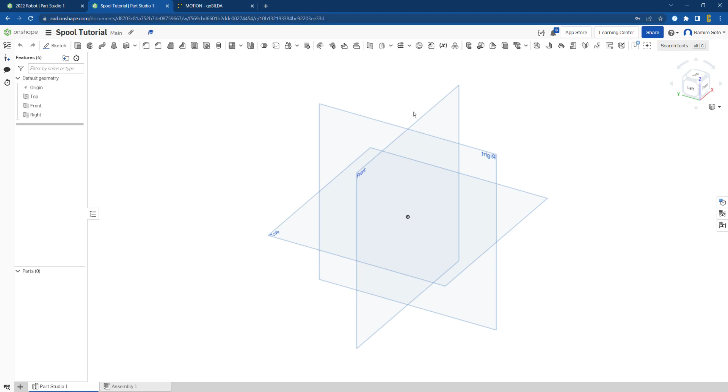Today what we're actually going to be trying to do is make a spool using the Revolve feature. So to start off, you would make a sketch like you normally would. So here's my sketch, I'm creating it, I'm going to select the right plane. With that, I can go ahead and hide the other planes, and I can actually start making my sketch.

The way Revolve actually works is that you basically create a profile of the thing you're trying to create, and then this profile will continue to rotate along its axis. With this, you're able to create complex circular shapes that would otherwise be hard to create. So, for example, in this tutorial, we're going to be trying to create a spool.

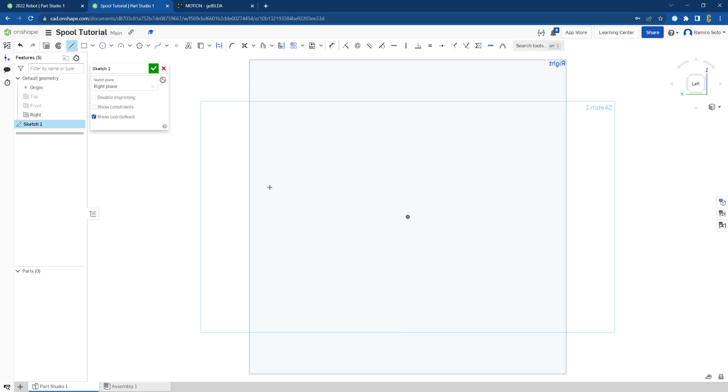So, to start off, we need to establish some things about the spool. In this case, I'm going to be making it a dual valley spool, meaning it's able to route two different strings without them interfering. So, let's start off. First, I'm going to go ahead and try making the first valley. I'm going to make it around, let's say, 32.5 millimeters. And I'm going to make it, let's say, 13.5 millimeters wide.

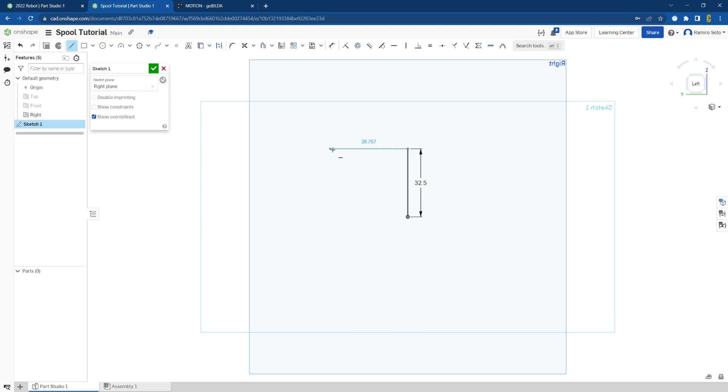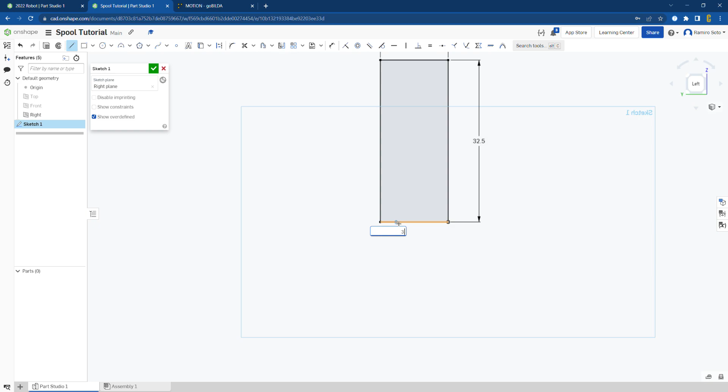Now I can go ahead and try finishing off the square. Obviously, if I were to try and do it like this, there'd be no actual walls for the string to spool around, right? So what I can do is make some other lines down here. I'm going to make this line 3.25 millimeters. And this time I'm only going to make it 28.5 millimeters. With this, I'm now able to connect to the edge.

Now, as you see, we're kind of creating a valley here. So essentially, the other side is going to be a mirror copy of this. By dragging over this line, I'm able to find the center point. If you notice when I highlighted it, a little midpoint symbol pops up. That means we're right in the center. So if I click there and go to side, you can see they're all equally spaced.

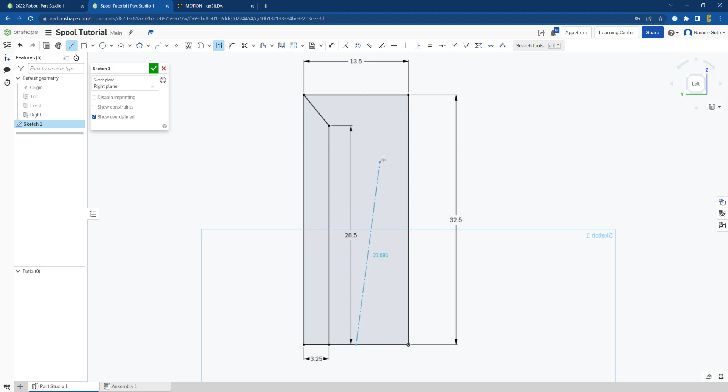If I press Q, that opens up construction. You can also press it from up here. What construction does is that there are lines that show up but don't actually affect the sketch. In other words, these lines won't cause a particular surface to be split into two. So with that, I'm going to make a line down the middle. This is essentially now a symmetry curve.

So I can use the mirror tool up here. Click on it. It prompts you to select the mirror line, which is essentially going to be the line of symmetry. In this case, it's this. And now it asks you to select the entities to be mirrored. So I'm going to be selecting this and this. So now if you notice, it's actually symmetrical. Now I can grab a line tool again and connect these two.

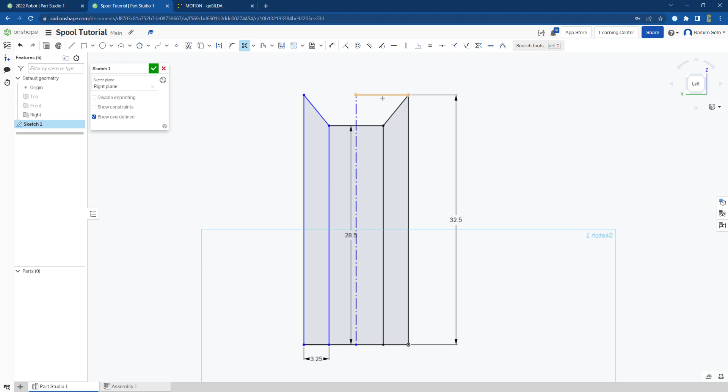Now, using these scissors up here, called the trim tool, I select this line segment and I can actually delete it. Now, as you may have noticed, those lines suddenly turned blue, which isn't a good thing because that means the sketch is no longer constrained. I can grab any line and drag it along, and that can begin to cause issues. So what I would do in that case is undo and put that line back.

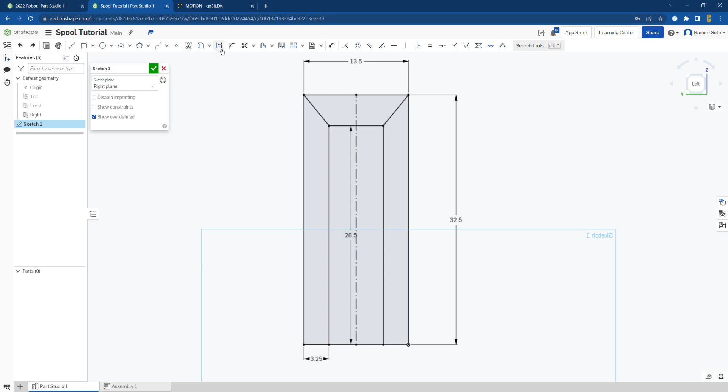And I'm actually going to make it a construction line like I showed. Oh, sorry, my bad. That was the mirror tool. Once I click on it and make it a construction line, you notice how that area is no longer grayed out, meaning it's no longer a surface that can actually be extruded and so on.

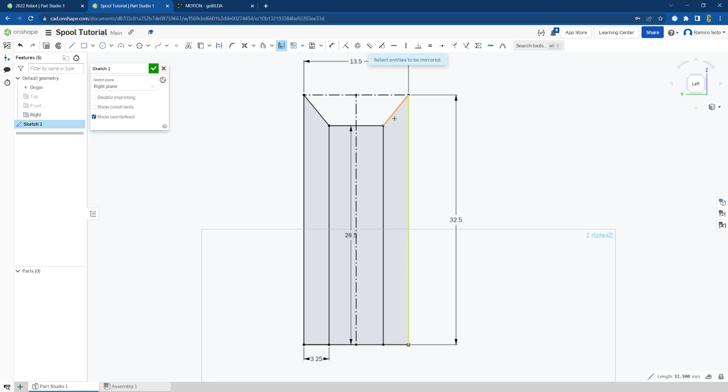So now since we said this was going to be a two-valley spool, we still have to make the other side. So once again, we can use the mirror utility, click on it. In this case, the mirror line is actually going to be this. And this time we're going to be selecting just about every line. So we'll click on this, this, this, this, and so on.

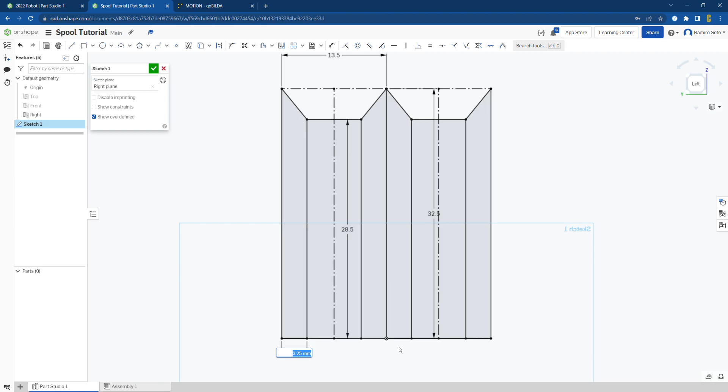So at this point, you can see how it's already mirrored. So the cool thing about mirroring and why it's such a useful tool is that, for example, if I were to do something like this and change this dimension to, let's say, 5 millimeters, you can see how the sketch automatically adjusts itself. I'm going to switch it back.

There's many other ways to start tweaking around with it. So let's say, for example, I actually want the spool to be wider. I can change this to 15. You see how that changes it. I'm going to leave it as it is for now.

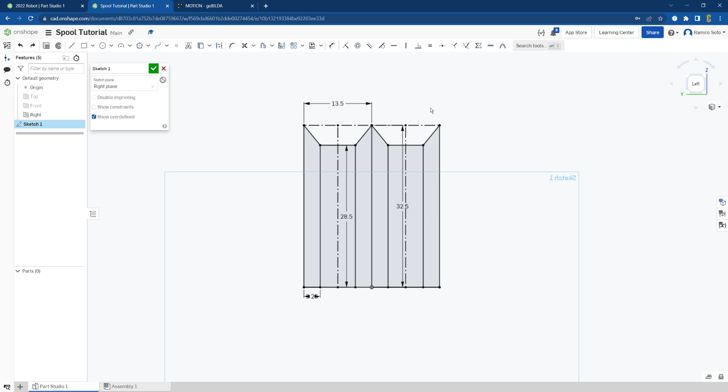Now, if you notice, this would have sharp edges here in the corner, and those can be kind of hard to print. So what I can actually do in that case is grab the fillet tool right here and select these two lines. What that does is it creates a circle between them to make the curve less of an actual pointy angle and more of a curve.

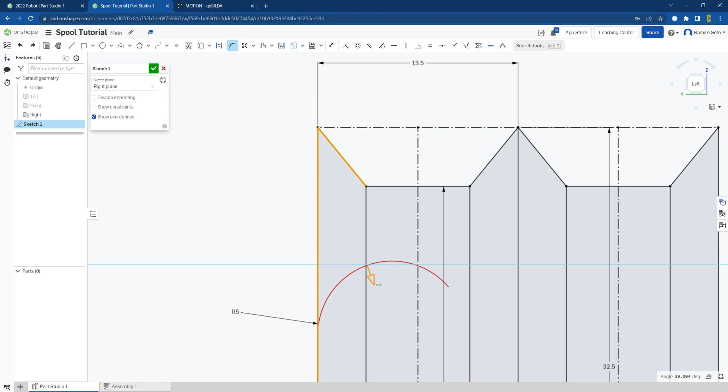If you see right now, it's a radius of 5. However, as you can tell, that's obviously too big, hence why the line is red. So if I move it, you start seeing how it actually starts turning blue, and you can kind of start seeing the effect it will do. For now, I'm going to make it a 0.5 millimeter fillet. Now, you see how this line is curved and not pointy like the rest.

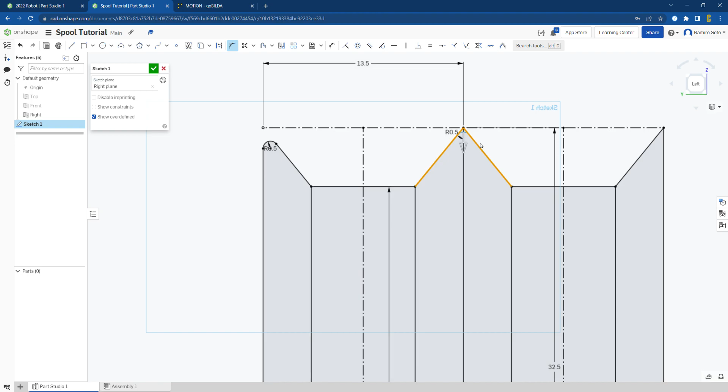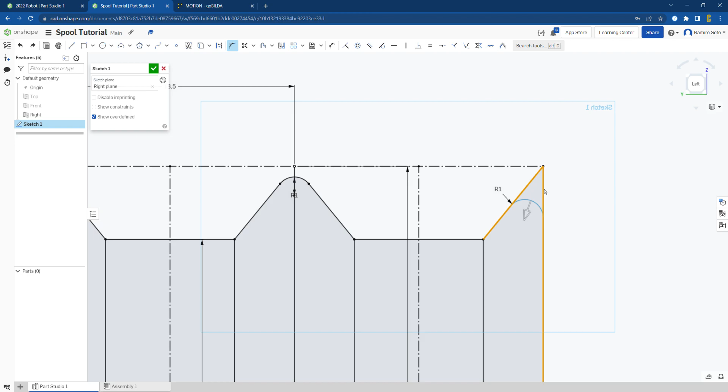Now I'm going to keep on doing that and repeat. For this line, since it's actually two lines, you would actually do a radius of 1 millimeter. And now these two should be at the same height. This one, we can go back to using 0.5 millimeters. Oops, sorry about that. So there's that radius of 0.5 millimeters.

With that, we're done with our sketch and we're ready to start revolving the sketch. So you can actually click on this tool called Revolve right here. Click on it and select the surface you would like to revolve. In this case, we're going to be revolving all surfaces.

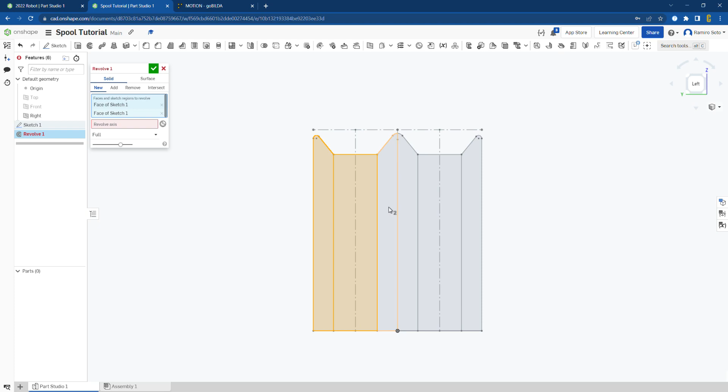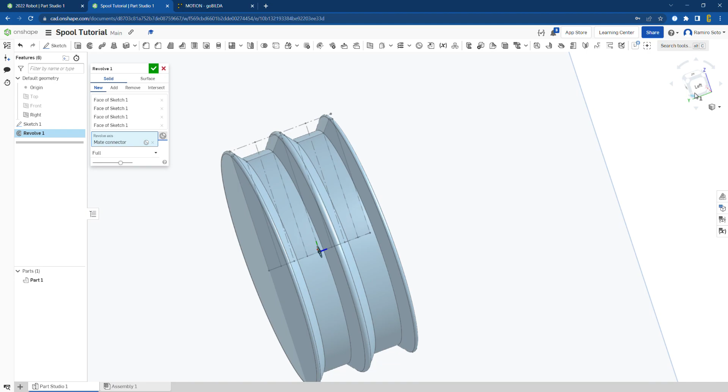Now, if you notice, it's prompting you for a revolve axis. That's basically where the line is going to be spinning along. So since we want it to spin in this direction, we have to find the mate that successfully does that. So right there should do it. Yes. So at that point, you see how it's doing a rotation basically of the sketch and spinning it around to create that sketch all the way throughout. It's almost like a side profile of the spool.

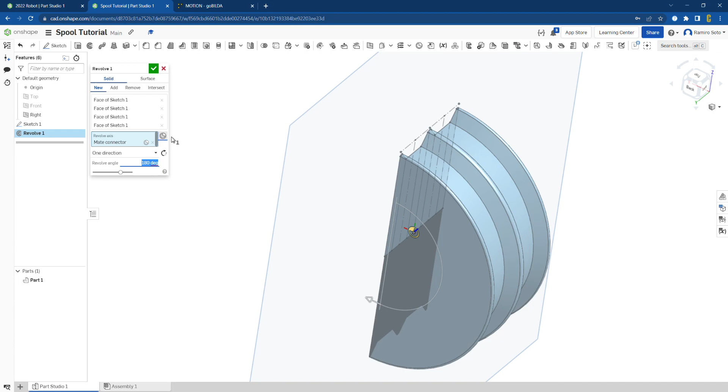You can also revolve it only a certain amount. So I can only do a certain angle. I could do maybe 180 degrees and so on. For now, I'm going to do a full revolve.

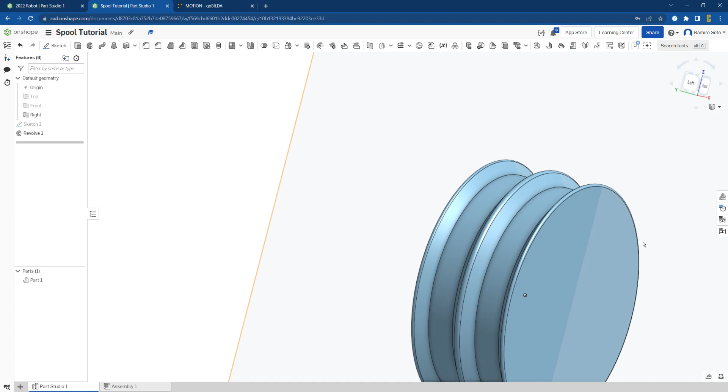Now with that, it's starting to look more like a spool, but we still have a couple of issues. For starters, we don't have anywhere to mount the string to, and we actually don't have anywhere to mount the actual goBILDA hub to. So an easy way to solve this is using one of these new surfaces we have created. We can make a sketch there. So I'm going to make it right here.

With that, I'd recommend finding the center point, which is actually pointed out here. And what I'm actually going to do is make a line all the way to here. Now I'm going to make it a construction line. If you notice, I'm not going to put any dimensions on it. Then I'm going to make another line that goes to the edge right there. It's also going to be a construction line, but this one is actually going to have dimensions on it.

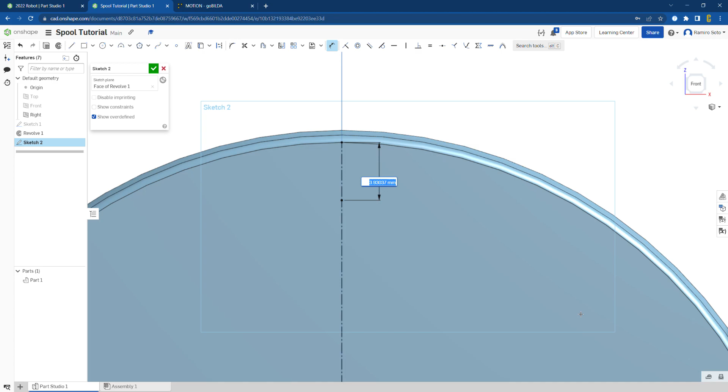You can do so by clicking on here, selecting it, selecting whatever dimension you want. In this case, I'm going to select 1.45 millimeters. Now, if you notice, when I did that, it shifted the other line that wasn't constrained. You see? And moved this point along.

So now from this point, I'm actually going to go ahead and try creating the actual holes for the string to attach to. So I'm going to bring this out, let's say 2 millimeters, and create a small hole there of around, let's say, 2 millimeters as well.

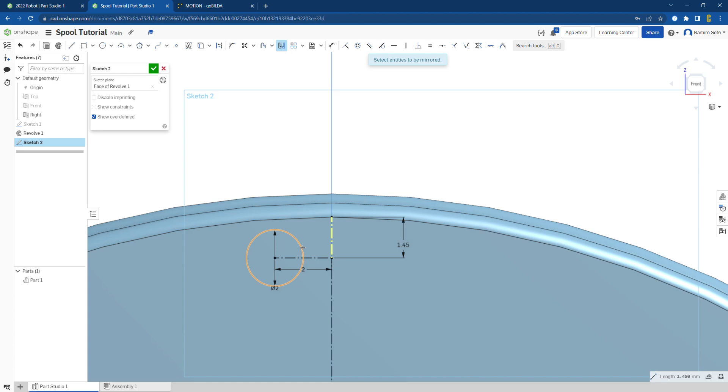With that, I'm actually going to go ahead and mirror the other side. So this is going to be the mirror line. These are going to be the entities we're mirroring. At that point, that side is done.

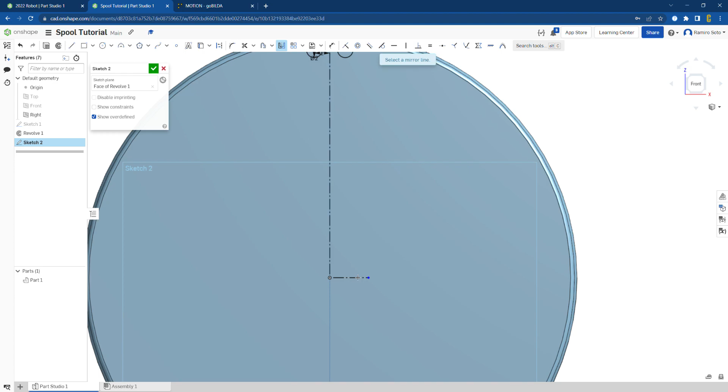What we can actually go ahead and do is add some mounting holes to the other side. So I'm going to choose a line through here, right in the center, and just make it perpendicular to the other. This is our mirror line. So I select it, and then I'm selecting these entities to be mirrored. At this point, we have mounting holes on both sides.

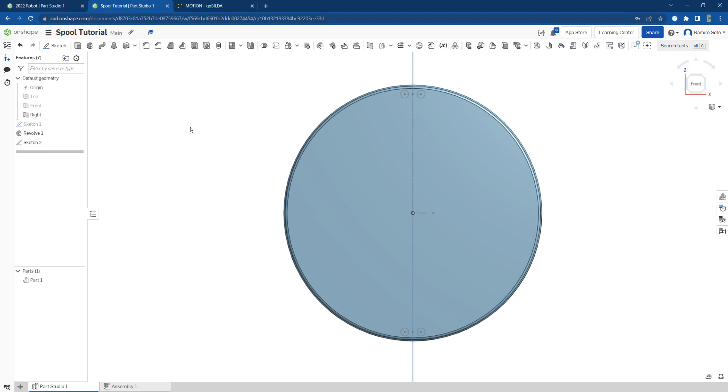So now the only thing we're missing is to actually add some mounting holes for the hub. So what I like to do for those is I like to go on the vendor's page, in this case goBILDA, and I try to look for it. So here they are, hubs. I'm going to be using a Sonic hub. I want it to have threads, and let's say I want the bore to be 8 millimeters REX.

I click on it, and if you see this sketch right here, this is actually a technical drawing, which includes all the dimensions you will need. So for example, if you see, the holes are spaced 16 millimeters from each other in a square. So what I can do at that point is make a center square, which has dimensions of 16 by 16 millimeters, and that should be able to achieve my spacing.

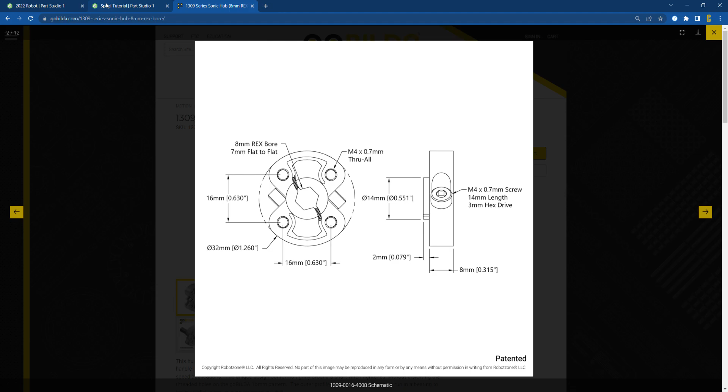Now, I'm actually going to want to have the hub tucked in. So if you notice, the hub is 32 millimeters. So just to account for clearances, I'm going to make it around 32.5 millimeters. So here we are back in the spool tutorial. Yep, right there. And I'm going to make that square I was talking about.

If you go up here, you're able to change the way rectangles are made. I'm going to change it to a center rectangle. So like I said, this is 16 by 16 millimeters. But first I'm going to make it a construction line, since this isn't actually going to be used for extruding. So I click on construction, which should be up here.

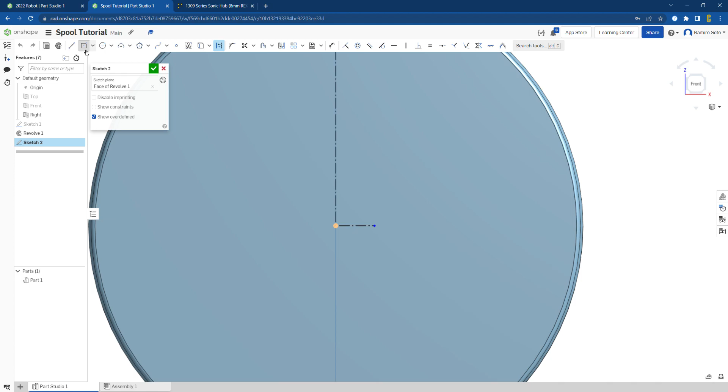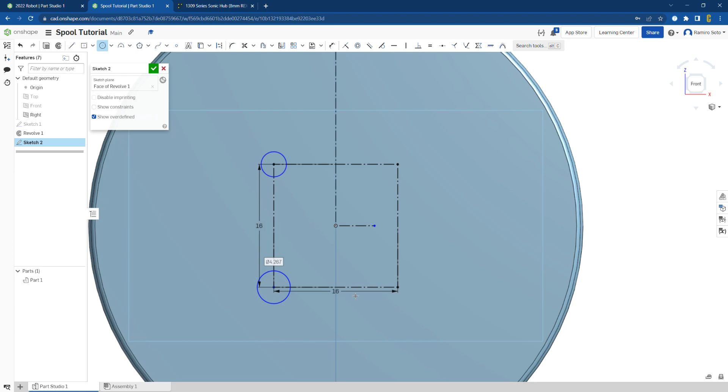Select the square and go ahead and draw it. Once I draw it out, I can type in my dimensions. So 16 by 16 millimeters. At that point, I should be able to sketch my circles. So I'm going to make one here, one here, one here, and one here.

Now, if you notice, they're all completely different sizes. So what I like to do is set them all equal to each other. And now they should all be the same size. So what I can do at that point is change the dimensions of one of them. So in this case, since these are 4 millimeter screws, you always want to account for tolerances for small holes. I'm going to make them 4.7 millimeters, which I found works great with 3D printed plastic. At that point, there's the actual holes made.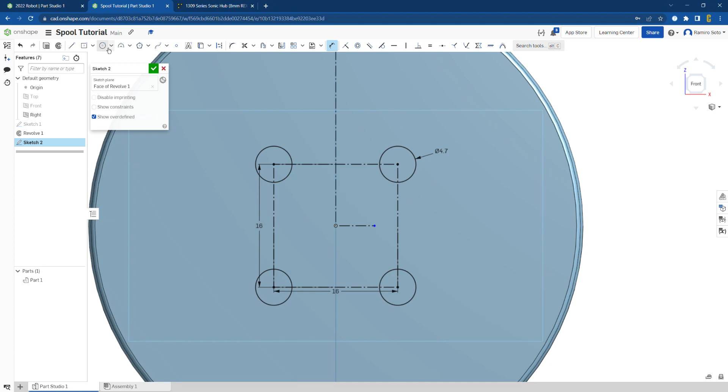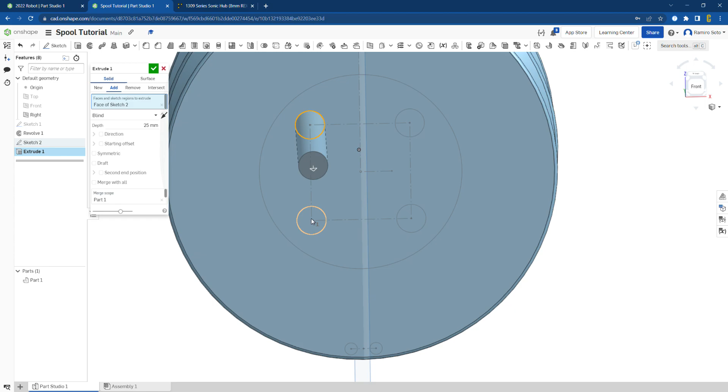Now, like I said, I actually want to tuck in the hub a little bit. So I'm actually going to make a 32.5 millimeter bore around the outside. So at that point, I should be ready to move on to the next step, and that is actually extruding. So I'm going to extrude these holes all the way through, click on remove, and I can click on through all. This goes through the whole part and removes the material, so the screws can actually fit through there.

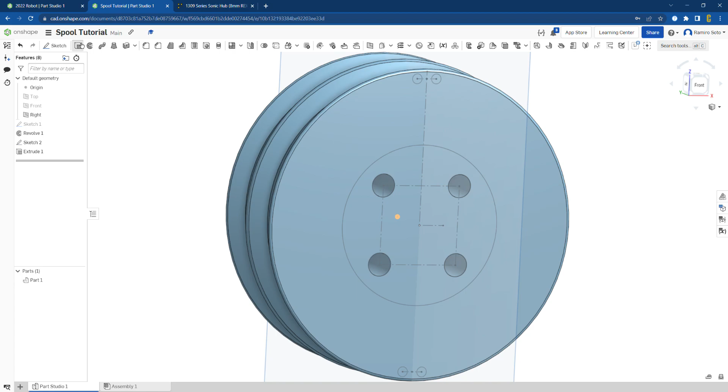Now, like I said, I was actually going to be tucking in the hub. So let's go ahead and tuck it in by selecting the sketch, selecting this circle, and actually clicking on remove material. At this point, it's kind of nice to switch to a side view because you can see just how much you're removing. So 14 millimeters sounds good. At that point, I can remove it, and there it is. Now you're ready to move on to the next video.

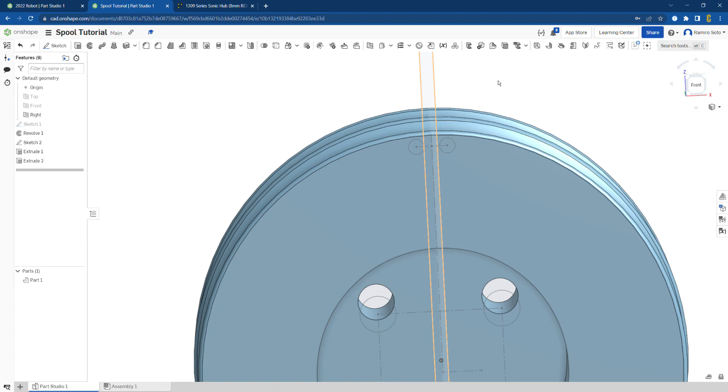Oh, actually, one quick thing. I forgot to remove these holes, which would be something similar, where you just click on remove, and you can actually click through all. And there it is. There's your finished part.